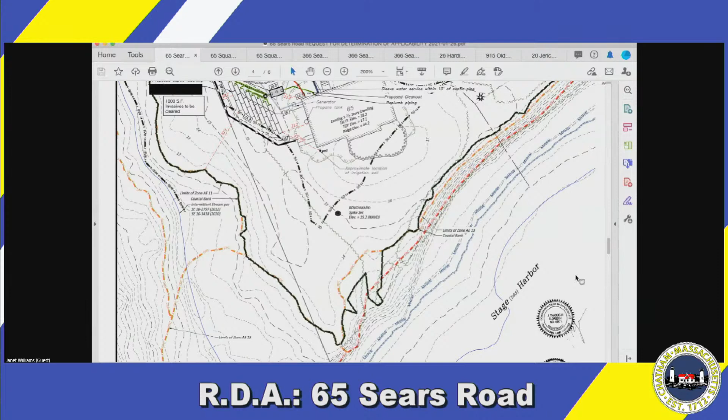Okay, and I know there was some comment about the nature of the water. I mean, there's land under the ocean, but is there also shellfish beds out there? You know, you have shellfish beds, you have a little bit of salt marsh, some beach, the coastal bank. Okay, I noticed, I'm sorry, I did it again, I apologize. That's quite all right. Our proposed work is more than 100 feet from the coastal bank along Stage Harbor, so we're more than 100 feet from those resource areas.

I understand. What I was concerned about was if the discharge from the septic would move through groundwater down towards Stage Harbor, and if there's any reason to be concerned that it might impact the shellfish beds or other resource areas that are not shown on the plan.

Well, it would no more impact it than what exists today. Well... oh, so there is an impact. That's what I'm asking. I want to understand what's happening with the system, especially one that's not that far away from groundwater. So the current system is closer to groundwater.

Yeah, Mr. Clark? Yes. Bill Riley again. Yeah, Bill. You know, you haven't been here that long, Tom, so perhaps... You're right, only a year. Seems like a little forever.

History might help. Beginning about 20 years ago, the Board of Health worked with a consortium of entities doing a study of embayments and the nitrogen loading in the embayments. Chatham was part of it. I think Harwich was part of it. Most of Cape Cod was part of it. And so we learned all about the nitrogen load in each of the embayments. And that's why, maybe 10 or 12 years ago, the town voted to spend over $200 million to sewer the town.

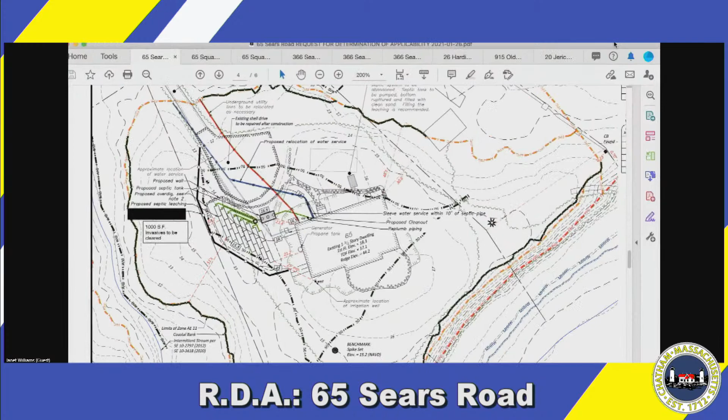Bob Rawls moved for a negative determination. Roll call vote for negative determination for 65 Sears Road. Commissioner Rawls, aye. Delvecchio, aye. Clark, aye. I vote aye as well. That's unanimous. Thank you. Have a great day.

All right, Paul, moving on to the next one. Thank you, Madam Chair. Next on the agenda is an amendment to an order of conditions. The following applicant has filed a request to amend an existing order of conditions at 65 Squanto Drive, Scott and Judith M. Stewart, SE 10-3376. Proposed modifications to an already approved project include an enclosed vestibule and basement level rinse station location, a slight expansion of the first floor deck on the easterly side, and relocation of a generator to the east side of the building, assessor's map 10C, parcel E16.

Okay, all right, is it up there? Yep, thank you. Okay.

So, along here are the Comptonia that they added. They also, originally there were 3 cedars proposed here; they added a 4th one. And then of the viburnum, there were 5 viburnum over here, they moved one of them over to the other side just to make room for the additional cedar.

I think that's it, and I would be happy to answer any questions. Okay, thank you very much. Bob Rawls, I'll start with you this time. Questions for Stephanie?

Yes, I guess it may not be particularly important. I don't see the revised site plan in Dropbox, but nevertheless I think I was able to follow along. My questions are on the planting plan anyway, and your explanation, Stephanie, helps.

I think what would help for the record is to more clearly indicate what's new, little arrows to the new plants, or somehow indicate it. You can read the text and get an idea of what's changing, but on the visuals I was not able to follow it. So if you could somehow indicate what is being added, specifically which plants are going where and which are new, other than that I don't think I have any issues with the overall change.

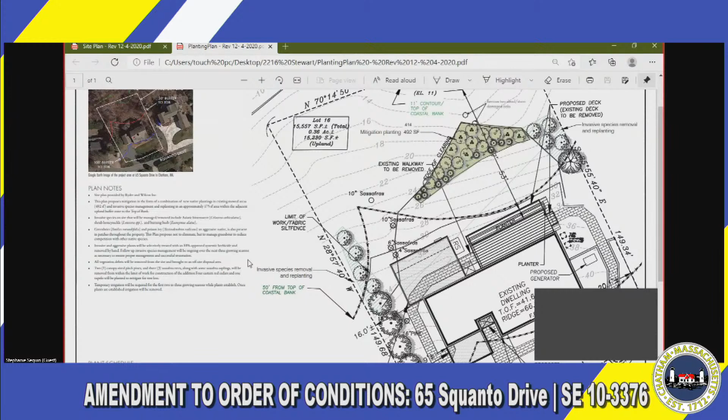Just email it to Mary and she'll forward it on to us, then we'll have it in the Dropbox. Thank you. So is there a motion to continue to March 3rd? Yes, Bob Rawls moved to continue to March 3rd. Is there a second? Clark, there you go. Roll call vote to continue 65 Squanto to March 3rd: Commissioner Rawls, aye; Del Vecchio, aye; Clark, aye; I vote aye as well. That's unanimous, we'll take that up at the work session on March 3rd.

Thank you very much. All right, moving on, next on the agenda we move now to notices of intent.

The first notice of intent is 227 Vineyard Avenue, James Azinaro Jr. and Azinaro, SE10 number not yet assigned. Proposed construction of garage addition, invasive species control at same address, assessors map 11C, parcel D131. The applicants requested a continuance - just to clarify, it's February 24th, because the agenda says February. Yeah, February 24th is the next hearing date for continuance.

Is there a motion then to continue 227 Vineyard to February 24th? Bob Rawls moved to continue to February 24th. Clark, second. Roll call vote to continue to February 24th: Commissioner Rawls, aye; Del Vecchio, aye; Clark, aye; I vote aye as well. That's unanimous, continued, we'll pick it up on the 24th.

Next notice of intent on the agenda is 366 Seapine Road, Cove Point LLC is the owner, Nicholas M. Lacallade - I have real trouble with that name. SE10, no SE number yet. Proposed alterations to existing hardscaping, including removal, replacement, expansion of driveway, patio, and walkways at 366 Sea Pine Road, assessors map 13K, parcel 11C24.

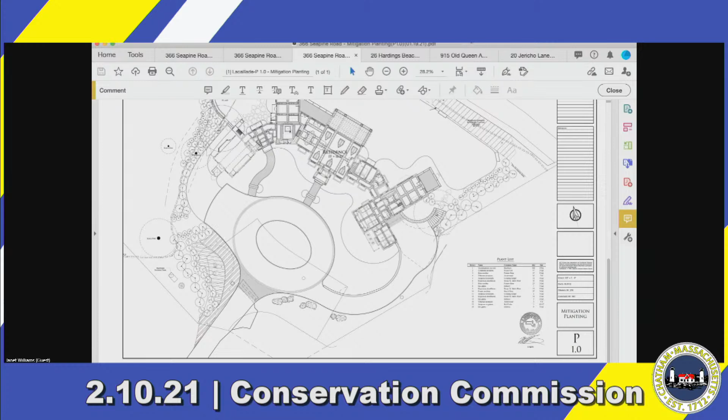So is there somebody from — I can't see the name of the firm. Sudbury Design. Sudbury, yeah, thank you, sorry, it's covered up. Mike Putu here. I think Stephanie covered things fairly well.

I would just reiterate that I think one of the substantial benefits to the mitigation here is the removal of lawn on the west side, where we're taking out driveway and lawn area and doing a fairly robust mitigation planting between the developed driveway and the top of the bank. As Stephanie said, the east side is more icing on the cake, we're just taking care of invasives throughout that area and revegetating with native material. I think it's a fairly aggressive offset for the hardscape, the additional hardscape that's proposed, and the removal of the asphalt and going to a porous driveway as well.

So happy to answer any questions that you might have. Okay, thank you very much.

One thing I'll notice, and I've now gone back to the site plan which I think your firm did as well — one thing that's not here on the plan, I'm struggling to see the 50-foot and 100-foot setback lines from the bank. I know that I remember this house, that the 50-foot no disturb line is almost all of the property except for a small area in the center. But if this is going to become the plan of record for this particular order, we would need to have those lines indicated, and I don't see that they are.

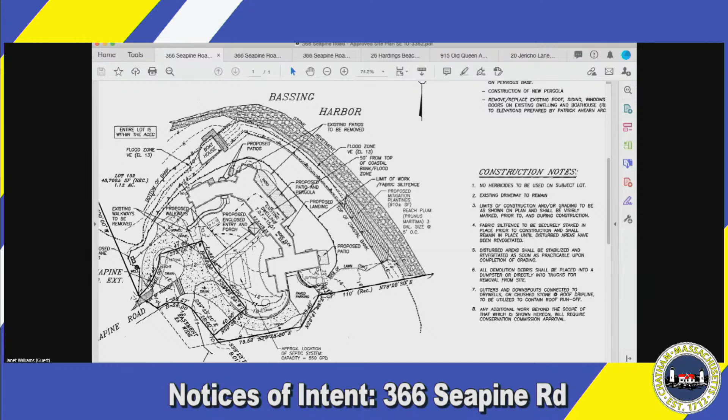Okay, so this is what I was saying. This is the previous site plan for the last order, 3352, and you can see this is the 50-foot line that runs that way. Just for the plan of record, I would like to see that on there. Okay, we can do that. It's on the site plan, both of them.

Is this portico a new element? Is that part in the narrative? That is on the approved site plan. Oh, it is, okay. So there's no change there. No changes. That too was the one addition to the building that has already been approved.

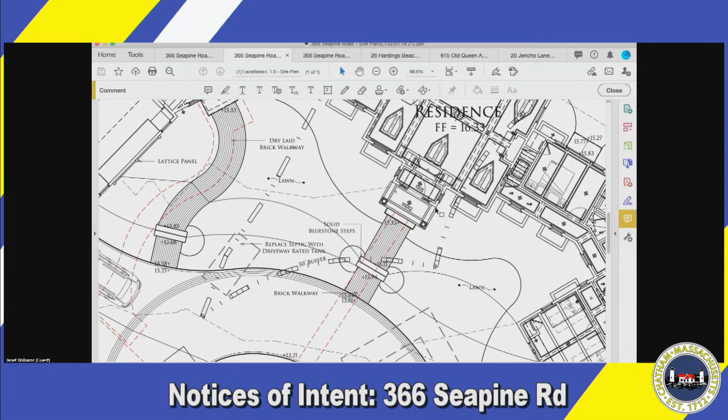All right, now that I've done what I can to clarify this, I'll turn it over to questions from other commissioners. Bob?

Yeah, I think overall - Bob Rawls, I assume - I think the plan in general is a well-designed improvement from an ecological perspective, with the bluestone driveways replaced. I guess there will be no asphalt left. Is that what you're saying? That's correct. Okay, and of course, the mitigation looks pretty robust.

The only other approach I can think of - remind me a bit about what's along the coastal bank in terms of vegetation. I know that there's a previous mitigation area to the right side. Was the majority of the bank comprised from that proposed mitigation that was previously approved, running all the way across to the boathouses, primarily Rosa rugosa and juniper? There's some juniper by the stairs going down by the boathouse. But with regard to invasives, they are not an issue there. Not really. Okay.

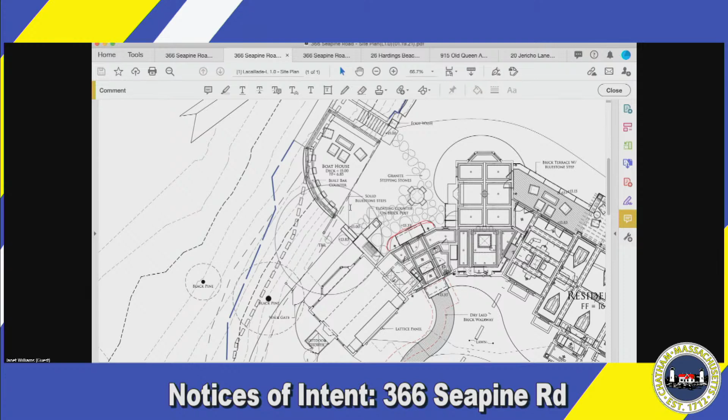So the flagstones, are those being used to create essentially a new patio in the back? Yes, there's a small area - that's outside of the kitchen. There's a little grill area, and then just some stepping stones through the landscape over to the boathouse stairs. Well, I guess the way it struck me was that that's essentially a new patio with a walkway. So yes, anyway, that's the way I'm thinking of it.

So what's the general size or diameter of those flagstones? The stones themselves will typically run between 2 foot and 4 foot in diameter. All right.

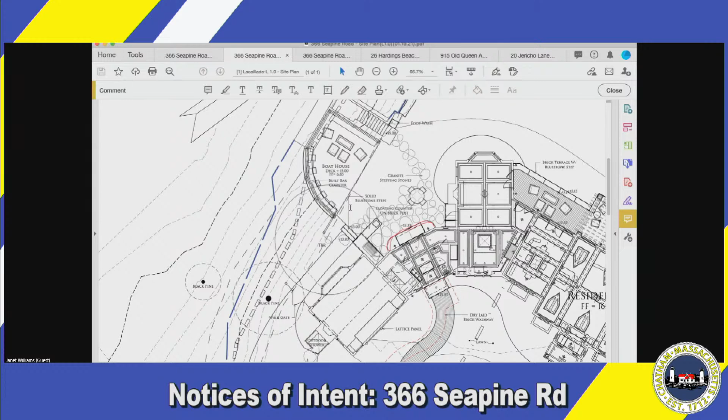Basically, my other question was, what will be left in terms of turf lawn? What I gather is that you are replacing any disturbed area with Cape Cod lawn. Is that correct? Yes. But if it's not disturbed and it's currently turf, it would remain that way. Correct. Okay.

Yeah, I don't have any other - I mean, in general, I think it's an improvement. I don't have any further questions.

Okay, thank you. Bob Delvecchio - sorry, I did that twice now today. That's all right, Rawls is a better name anyway. It's a shorter name. But anyway, I got a few questions.

The mitigation areas, will they be demarcated with anything? Yes, I'm sorry - along the west side of the west side mitigation, we didn't have anything that demarcated that. We did have the granite stones sort of at the top of the bank on the north side of the lawn, between the lawn and the mitigation and the top of the coastal bank.

And the granite demarcates the mitigation on the coastal bank? That's correct. Okay, and is there any way you could add anything to the west end where the mitigation will be? We could do it with a few boulders or some additional granite blocks - that wouldn't be a problem. Okay, and how about the east end? Yeah, we could carry the same theme throughout, I think. Okay, just so people understand that it's a kind of protected area.

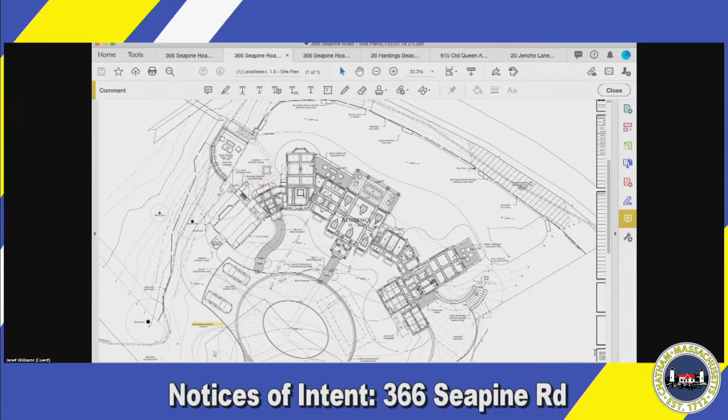Second. Roll call vote to continue 366 Seapine to February 24th. Commissioner Rawls, aye. Delvecchio, aye. Clark, aye. I vote aye. That's unanimous. We will continue this conversation on the 24th. Thank you very much.

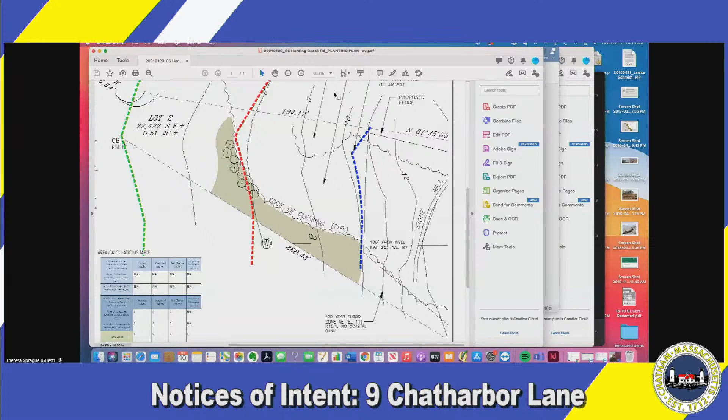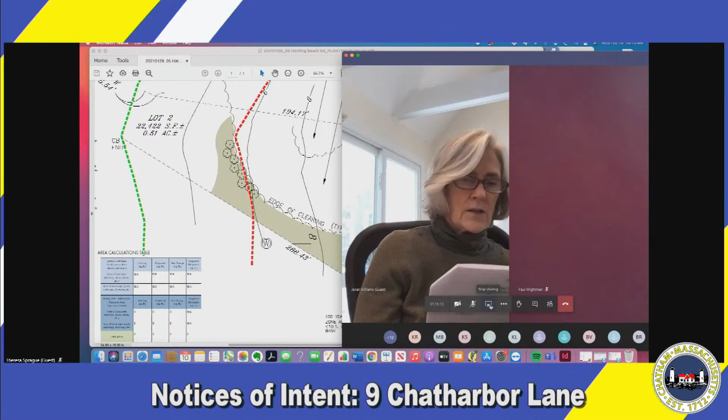The applicants requested a continuance to February 24th, 2021. Is there a motion to continue this to February 24th? Bob Rawls, move to continue to February 24th. Clark, second. Roll call vote to continue 9 Chatharbor Lane to February 24th. Commissioner Rawls, aye. Delvecchio, aye. Clark, aye. I vote aye. That's unanimous.

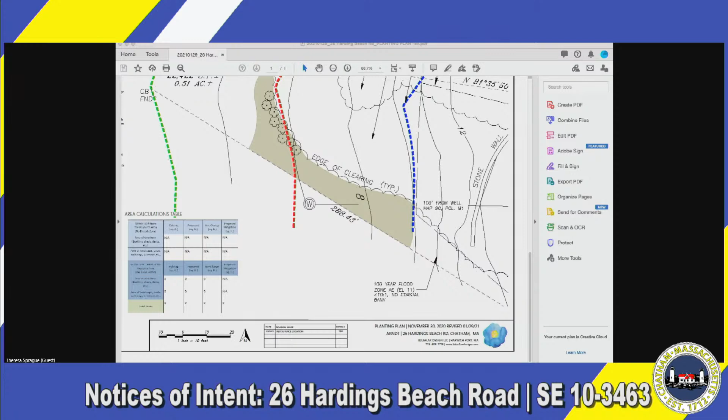All right, Paul, ready to move on. Okay, next on the agenda is 915 Old Queen Anne Road, Molly B. Logan, owner, applicant SE 103462, proposed construction at grade, access steps to Schoolhouse Pond, removal of damaged and diseased trees within the buffer to an inland bank at 915 Old Queen Anne Road, assessor's map 7H, parcel T4.

Good morning again, Theresa Sprague, here from Blue Flax Design on behalf of the Logan and Brown family, property owners at 915 Old Queen Anne Road. I'm not sure if David Clark is on the call, but I believe the questions were mainly related to our proposed vista management and vegetation management. So with that, I will share my screen, just trying to clean it up a little bit so you don't have to see everything else open on my screen right now.

Okay, let's take a look at this. You are looking at the proposed planting plan and management plan. We had an opportunity to meet on site along with our arborist, Kyle Bressner, who is also on this call and happy to answer any questions regarding the proposed management. To quickly run through, we have a previously managed vista corridor, and I sent you copies of the approved RDA that was approved in the past by the Chatham Conservation Commission for pruning within this area. As you can see from that pruning plan and what we've shown in the field compared to this plan, we are actually shrinking the size of the vista corridor, so all of the vista management will be to the north of the existing path to the beach.

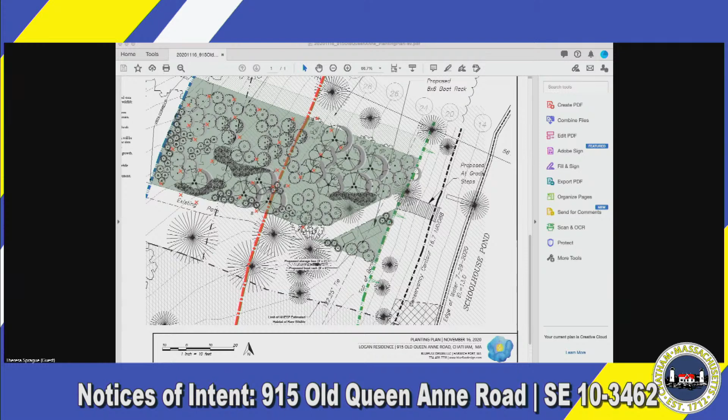So I'm going to add the permanent markings for the view corridor and low shrubs along the at-grade steps. That's the one, shrubs, I had that. Okay, perfect, thank you so much. All right, Paul, ready to move on.

Next on the agenda, 20 Jericho Lane LLC, Mark Labovitz, manager, Eastwood Companies, applicant, SE 103467. Continuance of a hearing for proposed demolition of existing dwelling and construction of a new dwelling within 100 feet of a coastal bank at 20 Jericho Lane, assessors map 10B, parcel B2, revised plans received. David Clark, on behalf of the applicant. I believe you have revised plans, both site plan and landscaping plan.

I think Andrew is on the line. Hang on a second, let me just check. I have the site plan here, let me just make sure. All I see is a revised plan inventory. Yeah, we'll have to track that down. When'd you send it, Dave? Susan Ledoux sent a revised set of plans last week, on the 3rd.

Plan letter, hang on, I got that from Eastwood. Oh, it has the planting list, not a landscape plan, it's the planting comparison. Okay, yep. The only change to the site plan was the commission wanted clarification on what's happening with the brick foundation from the old pump house. So I added a note showing that will be removed. There is a concrete slab there with a manhole cover, and a pump used for irrigation that will remain, but the brick surrounds serve no purpose and those will be removed.

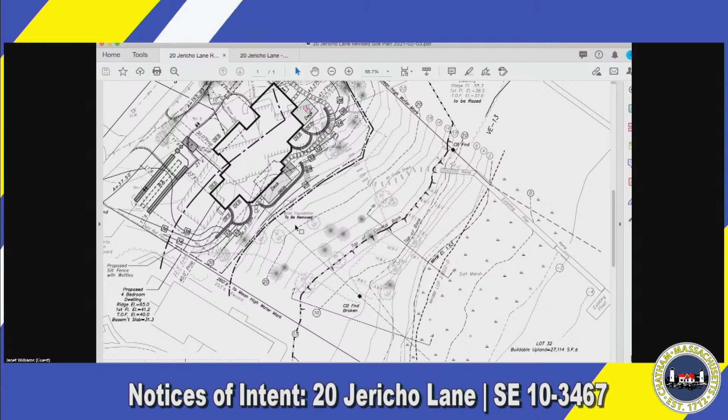I don't have any notes about other changes anybody wanted to see to the site plan. I only had one question, same as before, about the path being put in. Part of it looks vertical to the slope, and I want to find out what's being done to ensure there's no erosive effect from the staircase going down the face of the slope. There is an existing footpath there now; up by the house, just a couple of new stones are proposed to tie in the new hardscape with the existing footpath. There's no sign of erosion along those steps now, they've been there for 60 years. If there was a problem, we probably would have seen significant erosion by now, but there really are none. Okay, thank you, that's my only concern.

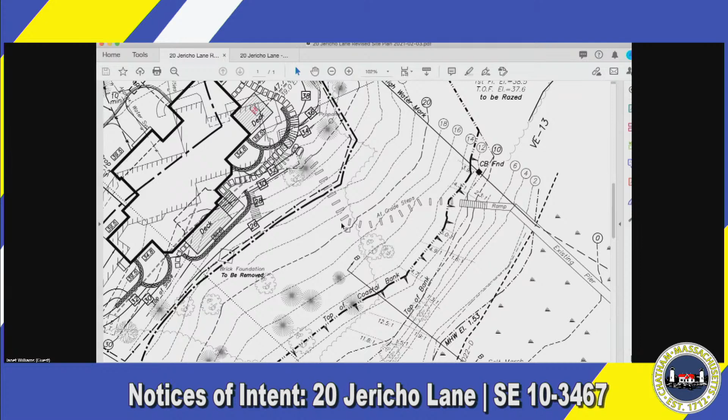So this is the revised landscape plan, I guess it's the planting list, this is what Susan sent. Hang on, let me make it smaller. This is Andrew Garrelay, I have the PDF on my screen I could share of the whole plan. I don't know why they didn't send it, that would be excellent. Can you email it? Yep.

Hi, can I jump in real quick? It's Susan Ledoux. Sure, Susan. Thank you, I sent everything digitally to Paul and Mary on the 3rd. I just resent it to Paul, so you should have the landscape plan and the site plan as well as this comparison. Thank you, okay, thank you.

Are you seeing my plan now? Yep. Okay.

It was requested that we put more native plants into the planting plan, and I talked with the homeowner. We discussed it, and I was able to change out some of the plants in the planting around the house, but he also thought he wanted to keep a certain amount of aesthetic plants in there as well.

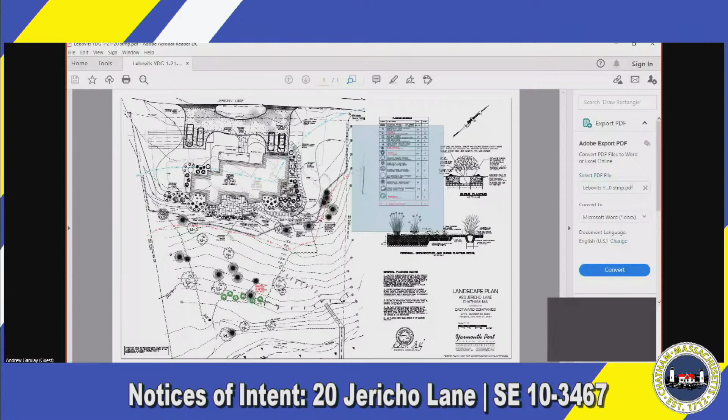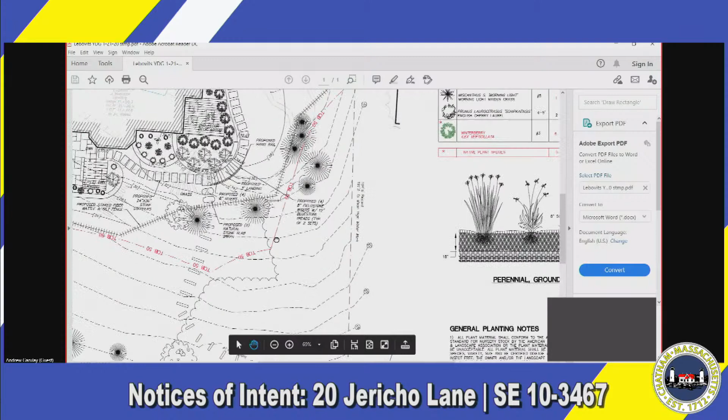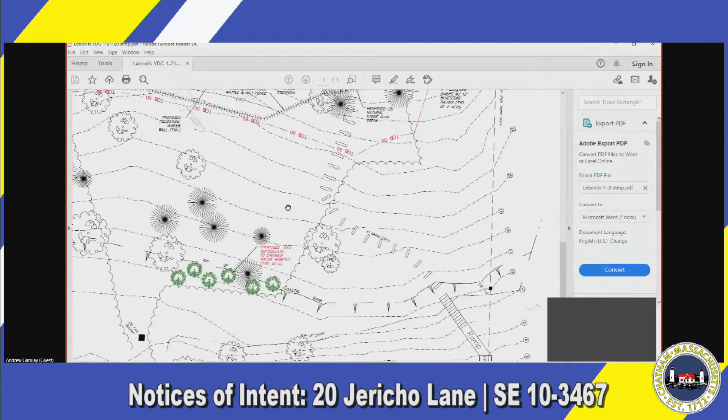So I've highlighted in red what I changed out into native plants. At the bottom of the list, you can see we have 57 native plants now in that planting, but he also thought it would make sense for the wildlife to add some winterberry down along the edge of the clearing, further down toward the water, as well as changing some of the plants in the planting bed.

So these are now inkberry, where before they were Japanese holly, and we have also some bush cinquefoil, which is on some native lists - it's not on all the native lists. And some bearberry also near the windows, so that we don't block the light going into the house. So there's a total of 57 native plants now where we did not have them before. That was what was requested of me.

Okay, well, thank you, appreciate that. Questions for Andrew?

Bob Rawls: I appreciate the introduction of some natives into essentially the foundation plantings and the outer area. That's good. I would take a little issue with the notion that natives can't be aesthetic - there are plenty of natives that bloom beautifully, so just wanted to give a little shout out to flowering native plants, of which there are many. We make baby steps on the road toward re-educating people about that.

Yeah, and I have a hard time finding those, to be honest with you. If somebody has a list and would like to forward that to me, I'd be very happy to try to use that as much as possible. We have some resources of places where they're available, we'll send that. But other than that, I don't have any further comment. Thank you.

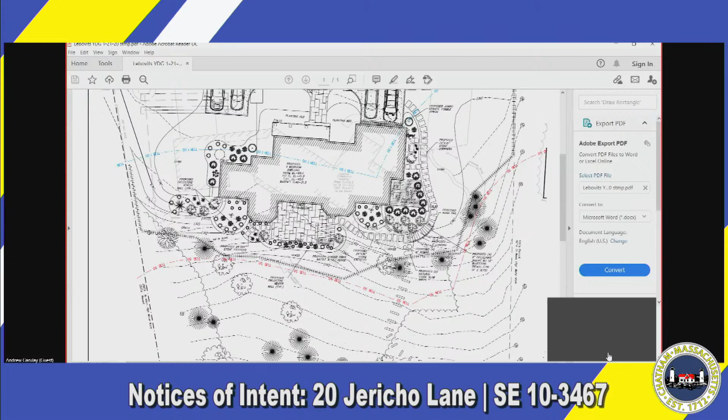Other comments or questions? Janet: I have a question for David. There was some issue with the flagging of the trees to make sure they weren't removed - has that been resolved? I don't recall an issue with the flagging of the trees on this project.

I thought it was the Bridge Street project last week. Yeah, I think we just... I think we talked about it, that there were some trees on the left side of the house that were flagged, and you had said that you were going to remove them, I thought. Unless I was dreaming, maybe that was another life ago. No, I don't know. No, I have it here.

You're right, Bob. As soon as you started speaking, I remember being confused on site, and what we were able to determine at the last hearing was that the trees flagged were for remaining, not for being removed - which is sort of the opposite of what we normally would expect. So I have here my notes: no trees in the jurisdiction area are being removed. Is that correct, David? That's my understanding, yes. Okay, that was my note as well. Yep, none of them are coming out, which was great because it was a little alarming to see a lot of flags, but they're all being protected.

Okay, that's all I had. Thank you. Okay, Tom? Oh, you asked about the steps. Any other questions or comments on 20 Jericho?